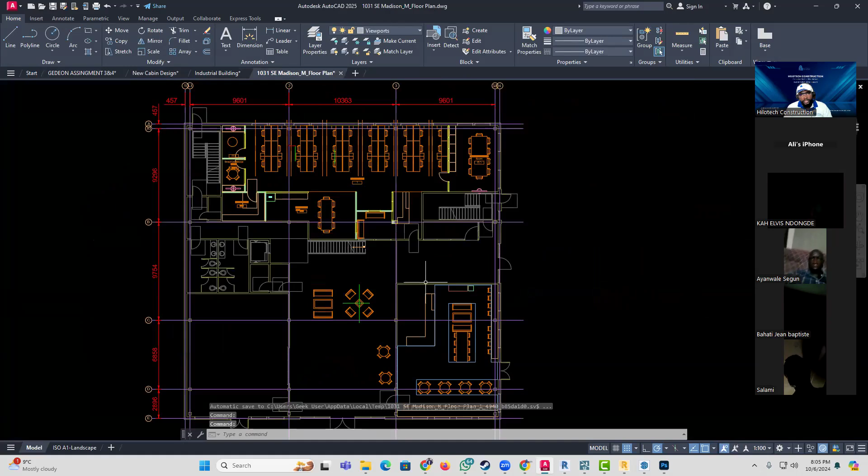And of course we can use AutoCAD to bring out architectural drawings like plans, blueprints, like the one we're seeing in front of us here. We can also bring out 3D, so we can bring out plans in two types: 2 dimensions and 3 dimensions. What is 2 dimension?

2 dimension means you can draw your plan in the X and Y axis. That's why when looking at this plan, you see it this way or this way — this is the Y axis, this is the X axis. That's what a 2 dimension plan means. Now a 3 dimension plan is one you can see in both X, Y, and Z. I'm not diving deep into that, just trying to make you easily understand.

So we were using CAD on AutoCAD and everything was moving smoothly, but there's a little problem. A lot of people just come into AutoCAD and start drawing, maybe because they don't have very good training in it, and they just dive in without any sense of direction. This is something that even professionals really struggle with.

When you come into AutoCAD, instead of using the software the right way to bring out designs, what kind of designs are we bringing out? We're bringing out drawings used for a project, what we call construction drawings. So what we are going over in this training is showing you how to use AutoCAD to really bring out construction drawings, not just normal drawings that anybody opens AutoCAD and dives into, drawing without any sense of direction. No, bringing out construction drawings. What does that mean?

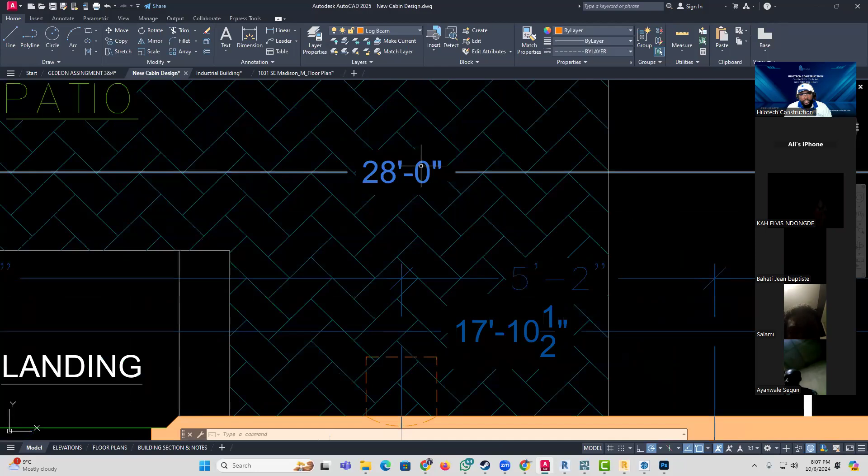Don't worry, the dimensions here are in imperial units, but we are going to be working with metric units. When I say imperial units, that means feet and inches, which you can see here. This is in imperial units, but we'll be working with metric units.

So when you look at this plan, what do you see? You can easily tell that this plan has a living room, a dining room, from the labeling and all that. What else can you see? You can see dimensions, but what else? If you look closely again, what else do you see on this plan?

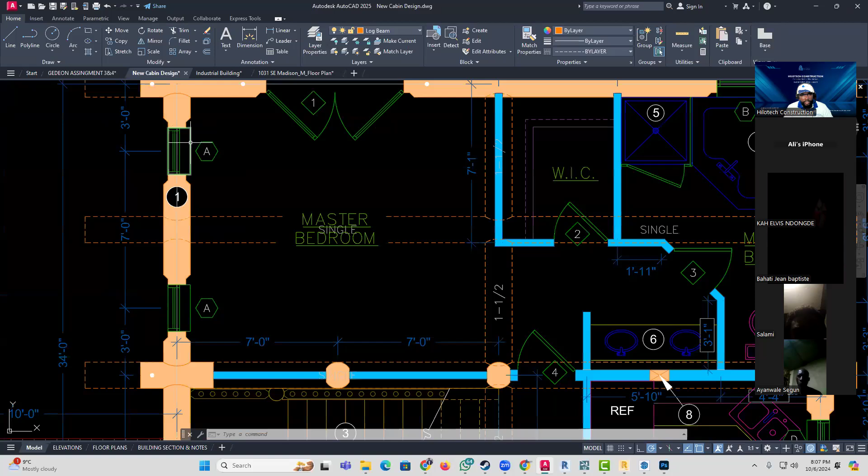You see there are certain points which have some stuff attached to them. Like here, it has a letter. There's another letter here, which is the same as this one. But coming here, we have this number. Do we have that same number again? No, we don't. So these are called tags.

Now what are tags? Tags are on plans to give you more in-depth detail of what this component is. First, looking at this plan, what is this? This here is the deck, or what they call the veranda or the porch, however you call it in your country or in your own building design code.

So this is the deck. Now from the deck you leave and come into the living room, and from the living room you can come to the dining. Now we have two components here. We have this one, it has 'H' attached to it. So this is the tag, which is what? H. So now, why do we have these tags on the plan?

The reason is because this architect is trying to bring out a construction drawing. He knows that the construction drawing does not just end with you bringing out a drawing that has dimensions and all. No, it has to be in such a way that even the manufacturer of all these openings understands it, because what we see here are openings.

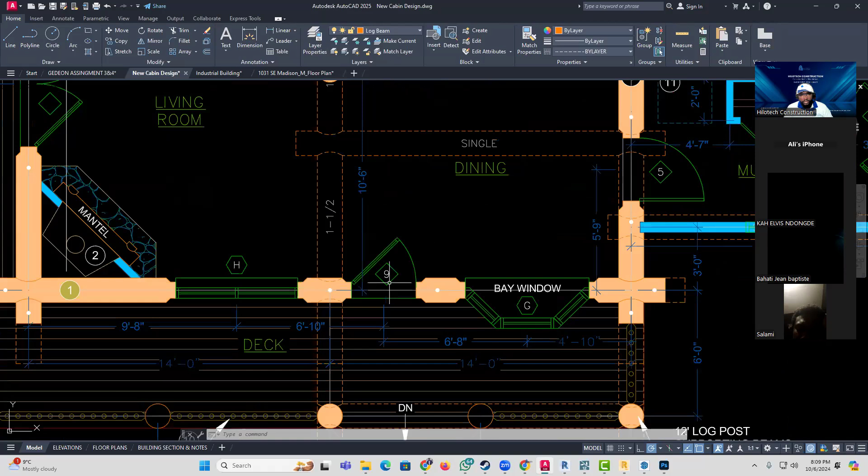This is a window, this is a door, this is another kind of window with a different design. This is another door, which is a single shutter. This one is double, another double one down here. You've got all the windows, but these windows and all these openings are made of different materials. They have different sizes, different heights.

They have all that. Now, for those of you who are really in the field, you'll all agree with me that there are a lot of projects that start, and it's at the level where they've brought up the skeletal work that you now start seeing them saying, 'Oh, okay, so what kind of window are we putting here now?' You now start taking measurements and go on from before. No, it is not supposed to be like that.

Bringing out a construction drawing means you're bringing out the plan as if you are building the structure in the plan. So by the time you are done with your plan, it has all the details that anybody who picks up that plan, whether it is the architect, the engineer on site, or the client, is able to understand it. Even the people that are going to be doing what?

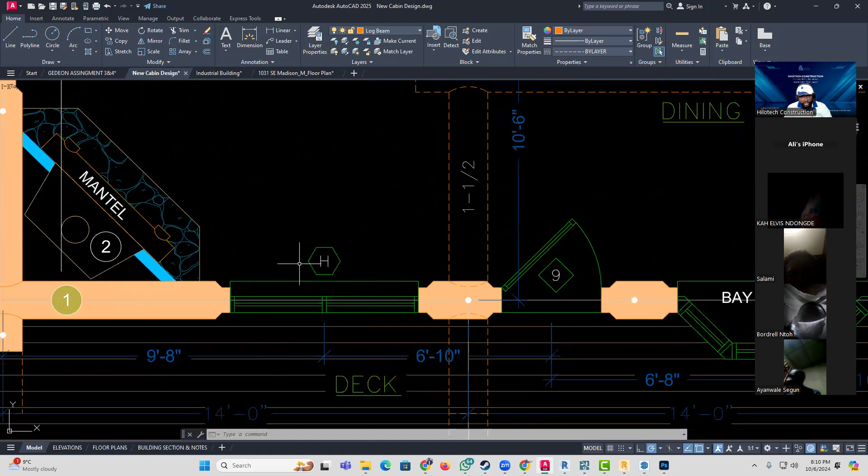Let me take this plan again, for instance. Imagine that this plan has been done like this. We have this tag here, H. Now, if we look around this plan, we don't see anything. We are like, oh, so what does this H really mean? What is this H talking about?

But if we come under the floor plans here, you are going to see this is that same floor plan that we're looking at there. If we look below, what do you see? We have a window schedule. So this window schedule has a series of symbols.

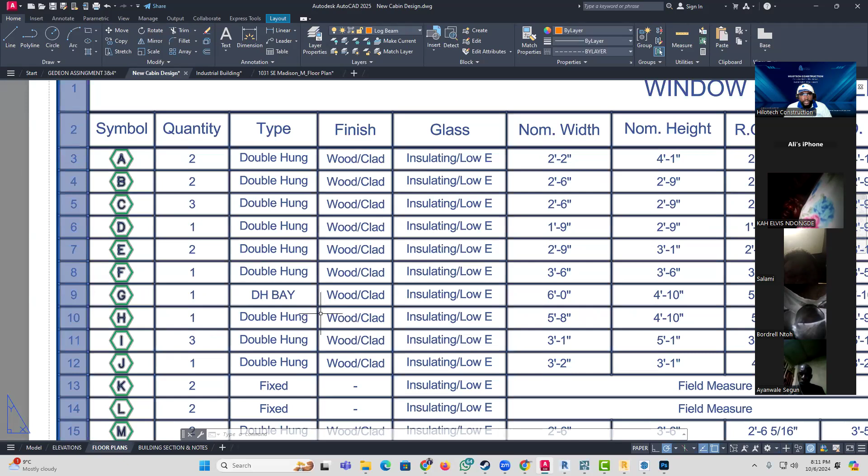Now, all these symbols here, these are those tags. And if we were to scroll and go to where we have H, we are going to see all the details of that component. We will see the quantity, we will see the type, we'll see the kind of finish that is going to be done there, and all that. We'll see the height, we'll see the width.

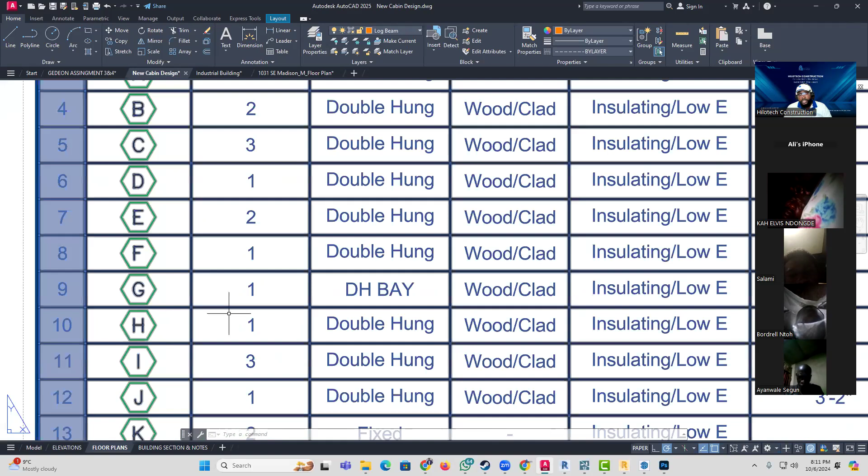Now, if the manufacturer of this window picks up this, he can just take this and go straight, and he doesn't even have to necessarily come to the site to verify this, even though it is very important to still come and verify, but you get the point. So anybody doing this is able to understand.

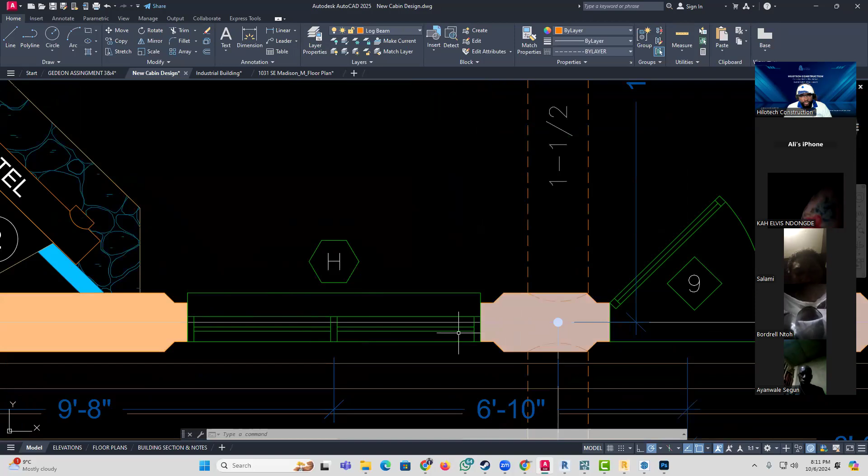So why is this important? This is important because if you have all these details, even the builder that is putting up this structure is going to understand that, okay, when I come to this wall, I have to allow a window of this set distance. You have to look at this window very well. You see that everything from the frames to the finish and everything is there.

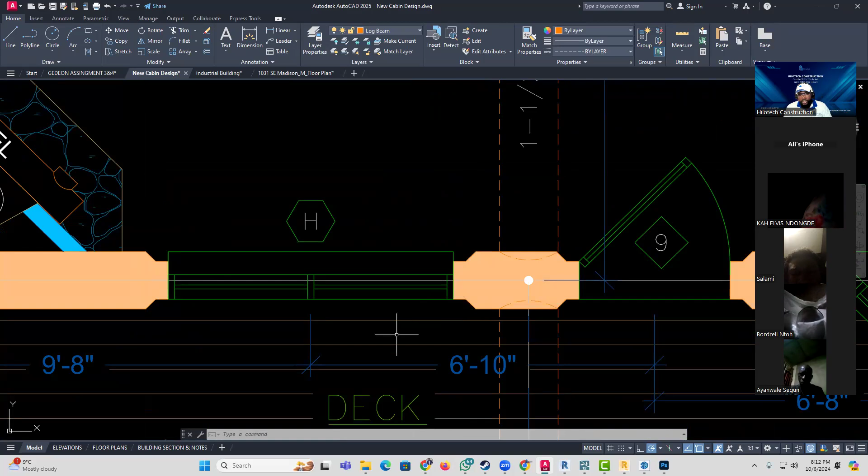A lot of people just come and they give the allowance, but you discover that maybe they just gave the width of the window. They didn't take into consideration little details like maybe the frame that is around the window, and that is more space. So what do you end up doing? Maybe you end up providing a smaller opening for a window that is not going to be able to give the accurate or appropriate ventilation that this building actually needed, and stuff like that.

So, what are construction drawings? Construction drawing simply means you are building the project on the plan, and it takes very good site and field experience. So, if you are in here and you think that being an architect or being a designer means you are only sitting on the computer, no.

A BIM expert is somebody who has a lot of site experience. It means if you have not been going to the site, you have to start going to the site, like a lot, okay? Because you are not a robot. You are not a robot. You are supposed to understand exactly what you are doing.

You are not supposed to just be doing things because, okay, you come and you will be like, all right, the bedroom, what is the normal size of a bedroom window? Okay, I'll be speaking in centimeters, please. So maybe 150 centimeters, that's 1.5 meters by maybe 1 meter. No, you are not supposed to be thinking like that. Okay? You're not supposed to be thinking like that.

You're supposed to know. And you have to know that with respect to whatever component you are dealing with, like the living room, nobody has to tell you that the size of the window you put in the living room is not the same size as the window you put in the bedroom. Why? Because the living room is going to normally need more ventilation because it has more space. Same with the dining, the kitchen too. You got the bedrooms now, and all that.

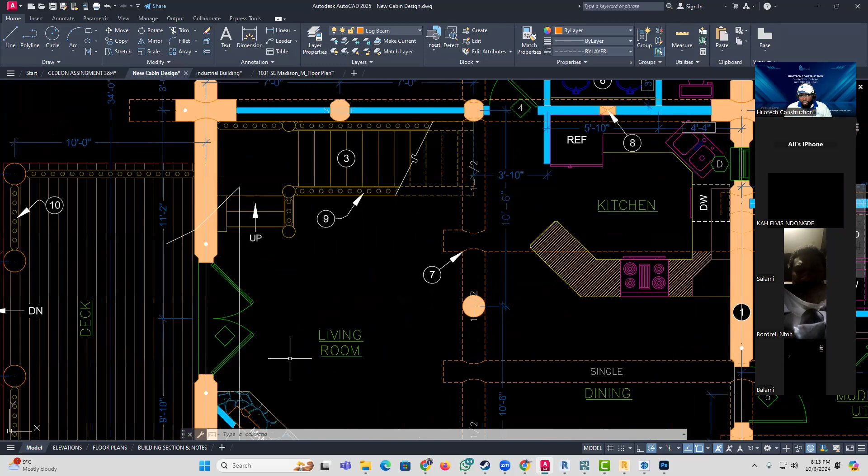Now, I'm just trying to limit this. The same thing goes with the doors. The same thing goes with the walls. The same thing goes with the columns. The same thing goes with all the different components that are actually making up the structure. Make sure that you put in all those key details.

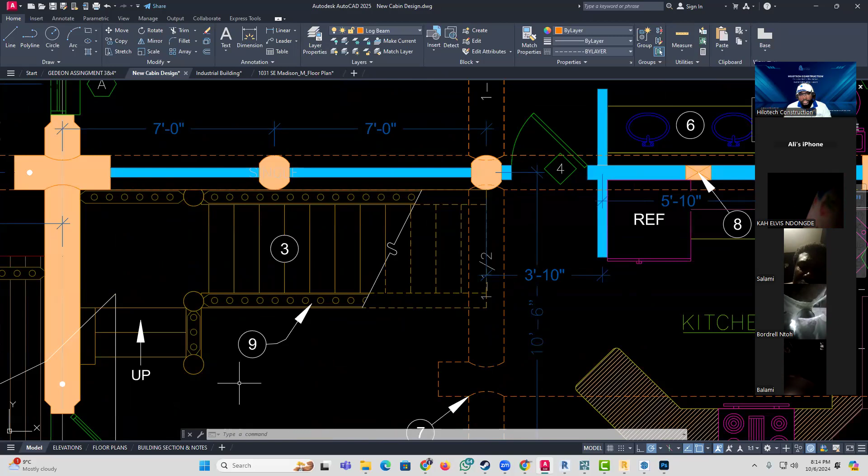Look at the staircase in this building. What do you notice here? Now, some architects will decide to put the height of the riser and the going on the staircase. But this architect has decided to put a tag. Why? He decided to put a tag, and there's another tag here which describes the railings that are going around the staircase. This architect is putting a tag here because he knows there is more information that he wants to put as far as this stair is concerned.

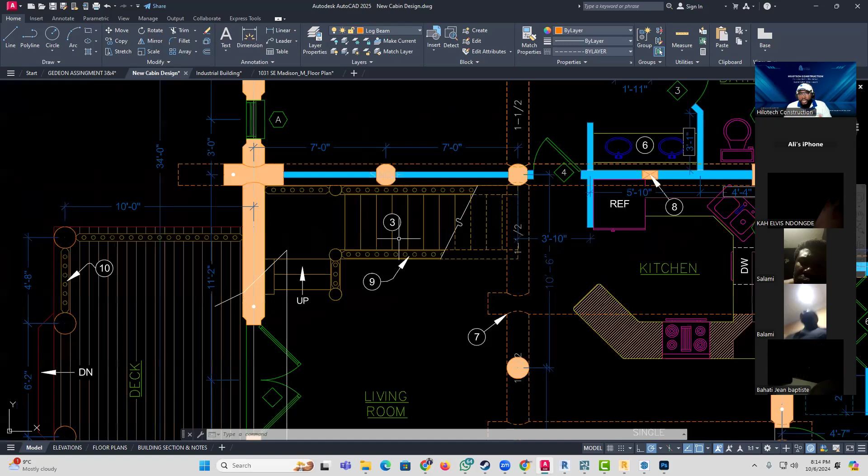Maybe the kind of finish - you can look at this staircase from the plan and go do a concrete stair, when the architect or designer actually wanted something more stylish, like maybe out of glass or wood. But you go and cast it out of reinforced concrete, which is not what is needed there.

But if you are intelligent enough, you are actually going to...

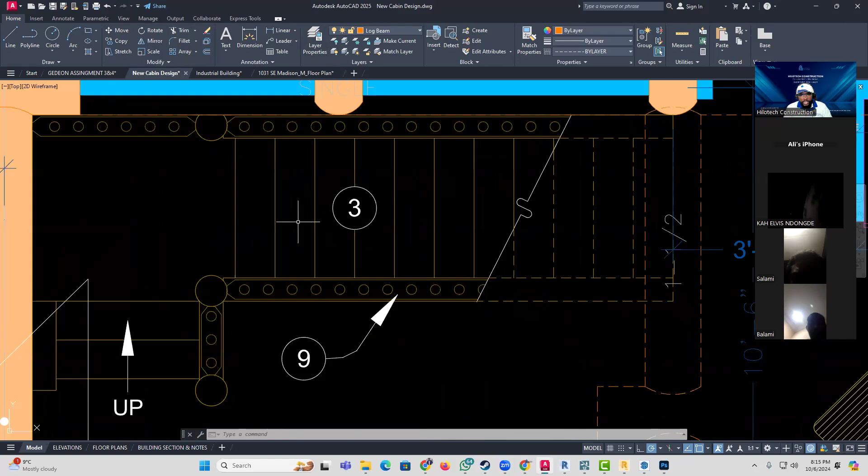Okay, so like I was saying, this designer has decided to put a tag here instead. Why is this important? This designer wants to take his time and describe exactly how this staircase is.

If we go to this tag, you'll see it contains all the information this stair has, from the risers - the step you take when raising your leg going up a stair, that is called a riser - to the going, which is the part you actually put your leg on. The going has to be of appropriate size, not too small or too big, you know that.

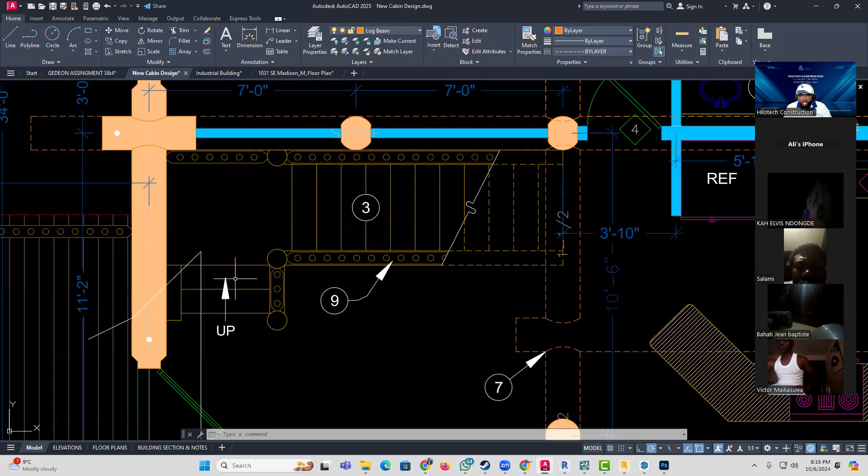So he takes his time and describes that, and in addition tells you the kind of material that has to be put here. Even on the railings, he tells you the kind of material on a separate tag, you see this? Now someone who knows how to interpret the plan well picks this up, understands this information, and goes straight to those tags.

Now coming to, let's say, the kitchen. This is the kitchen setup. By the way, it is the open kitchen, the American standard kind of kitchen. You can see there is no wall separating the kitchen from the living room or dining - it's just open. These designs are always done like this.

So you have a whole living setup, it doesn't mean anybody in the kitchen is cut off from the family. If you're in the kitchen cooking, you can still be discussing with whoever is here. So it's kind of a modern design.

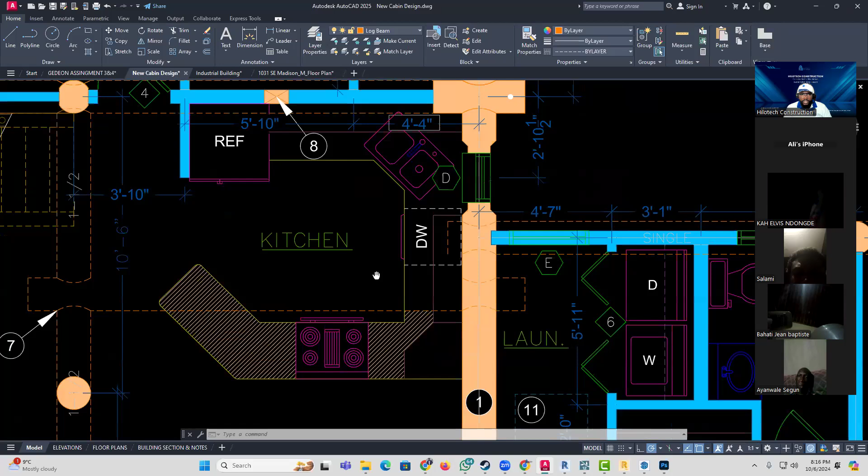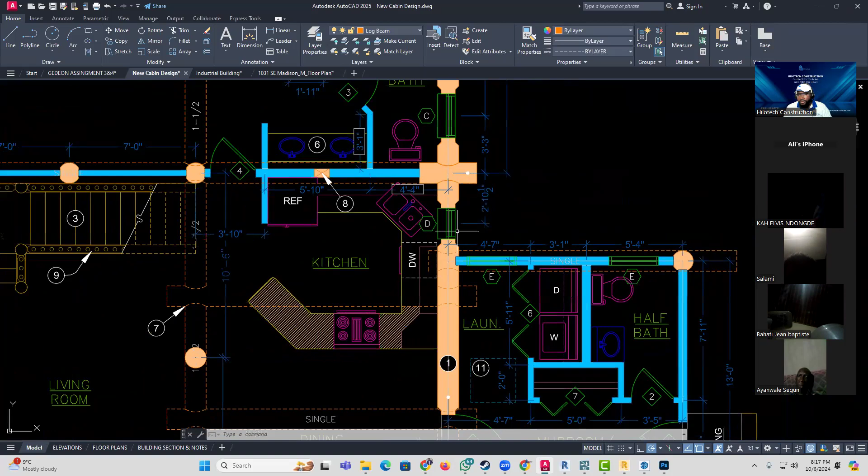And because this is a modern design, such designs always have stuff that takes out the smoke when you're cooking, and the scents that come out. That's why you see this window here is small, because really there's no need for a very big window here, since that compartment ventilates the kitchen. But you are supposed to make that known, because somebody picking up this plan to execute might not know that, and they put this window here without making provision for that, and it becomes a problem for ventilation.

You get the point. Now you see there is another tag there, another tag here on this column close to the kitchen. So the point I want you to note is a construction drawing is not something that is specific - it depends on you, but you have to know what you are doing.

And what we are going to be going over, as far as the whole program of the construction drawing, we're going to show you how we take you from scratch to a professional, and you are going to be able to design your own drawings using your own system.

What do I mean by your own system? I'm not supposed to do a plan, or Hilotech Construction is not supposed to do a plan, and you or another company, if you're the owner of a company or an architect, do a plan and we look at it and it's the same. No, you have to have your own system of design. It can be that your units are different, it can be that your layers are different - of course the layers must always be different. What do I mean by layers?

If you look at this plan very well, you are going to see that the windows have a different color from maybe the deck, from the walls and all that. You see all the furniture in the kitchen here, they have different colors. It's not just there for decoration. These are all different layers.

Why is this important? This is important because if I want to do something on this plan, I can easily hide all these other components. I create a copy of this and unhide them back, and they're going to remain only on the parent copy. We're going to be seeing all that. We're also going to be seeing how you can create title blocks for yourself.

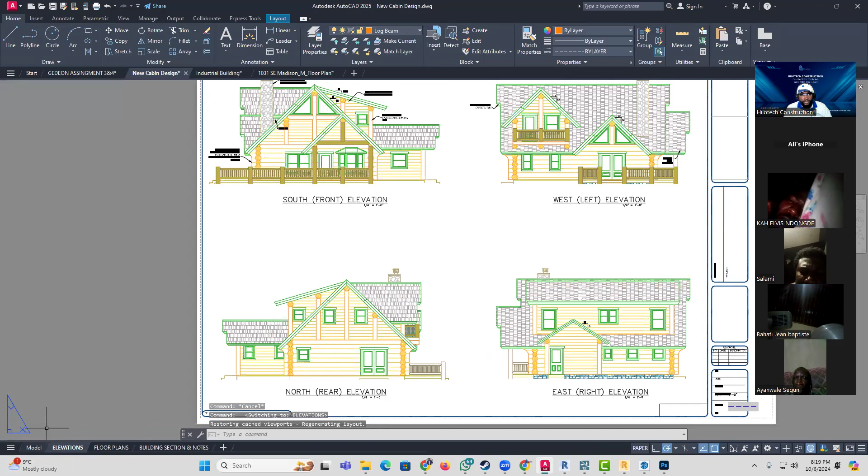Now, if you look at this, this is what we call a title block. A lot of architects and professionals don't even work with a title block. They think that working in AutoCAD is just for you to come in here, draw your plan in your model tab, because what we are currently in is the model tab. You bring out your plan here in the model tab, and that is it. Now, when you want to plot out your plan, what do you do? You come up here to plot, or you just press Control P and start plotting independently, one after the other.

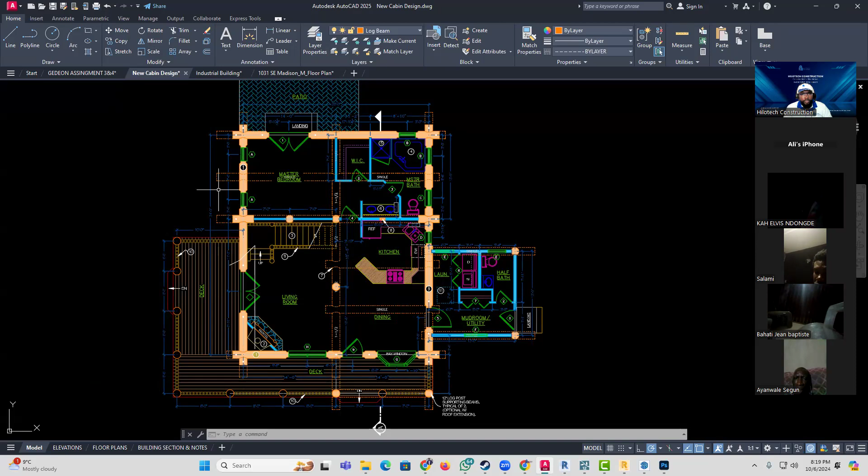No, it's not supposed to be like that. We'll show you how you can bring out an appropriate title block for yourself. I'm going to share a sample assignment here from a past student.

This is a past student, Gedeon, and he's still a current student actually. He's done with AutoCAD, and he's now in Revit, I think. So you see what he did. Now this is his title block. This is what is called a title block.

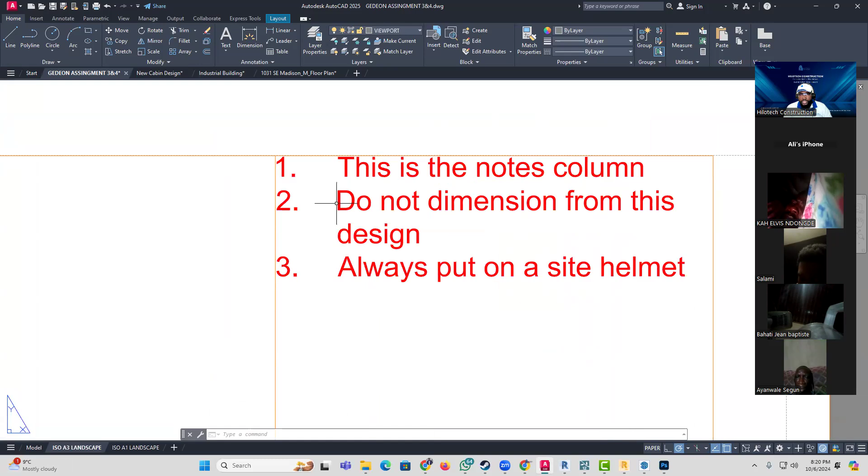Now, a title block has to be independent to each other. He designed this title block for A3. So this is what he brings in all his plans on. What do you notice on this title block? It has the name of the plan, it has his Gmail, it has other construction details, which can be like notes that you put for security on the site.

Then, of course, it also has his details here. It has been drawn by Gedeon, it has been checked by Hilotech, and approved by whatever regulatory body that you have in your council, in your country. Now, in here, this is where you bring in the plans. Like, for instance, you see on the next page, now you see he starts bringing in his plans here.

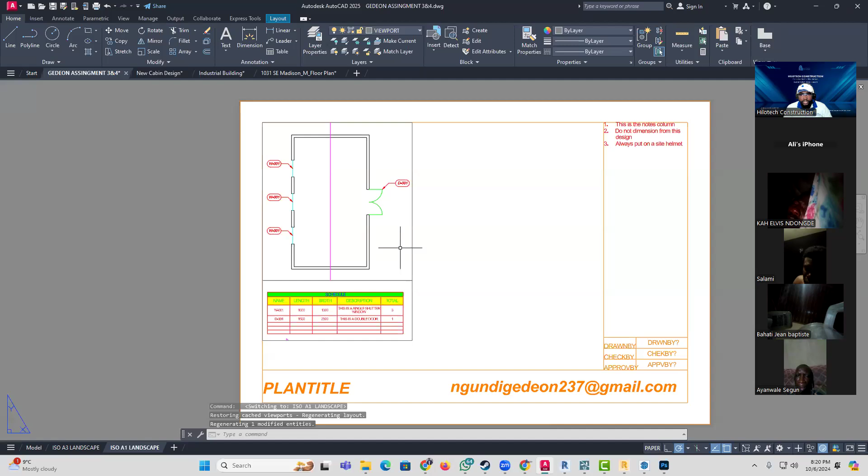So by the time he prints out this plan, and it is very easy for you to print using the title block, it's going to come out with all these little bits of information. Do you see what he is doing here? I want you to take note of what he's doing here. This is just a simple, very simple, open room kind of plan. But pay close attention to what he does.

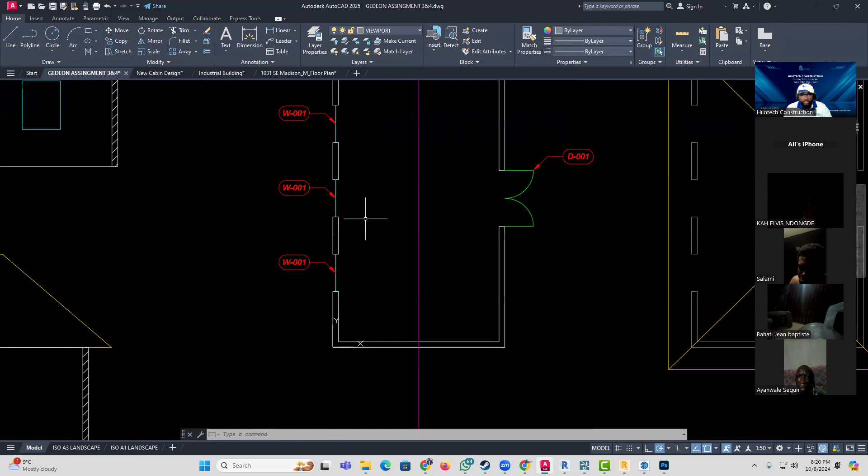Now, you see this? He's putting some numbers here on the windows. The door has a kind of number too. You don't really know what this means, but going up here, he creates a table and calls this schedule. Now you see name, length, width, description, and total.

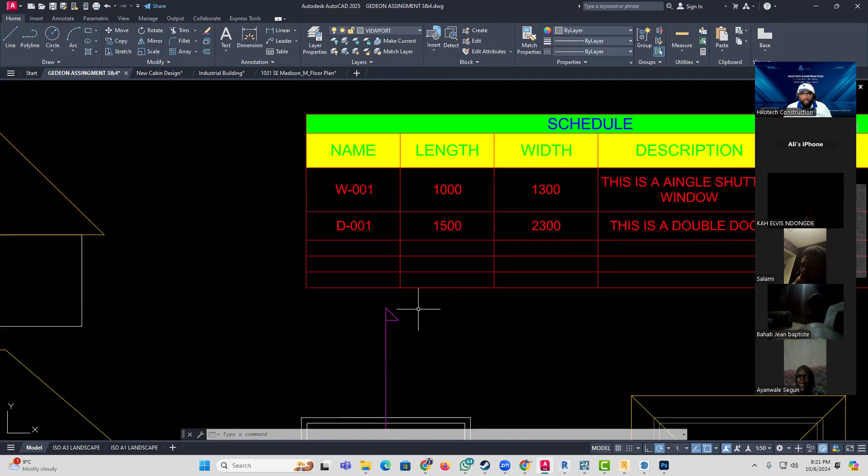Now, look at this. He comes here, he says W001. If you go on his schedule, you are going to see that W001 is, under the description, he says this is a single shutter window, and there are three of them. So if a manufacturer was to pick this up, the manufacturer of these windows, he's just going to know exactly that the length has to be 1000 millimeters. He's designing in millimeters, by 1300 millimeters, or 1 meter by 1.3 meters, or 100 centimeters by 130 centimeters. I'm just trying to cover all this so you understand that.

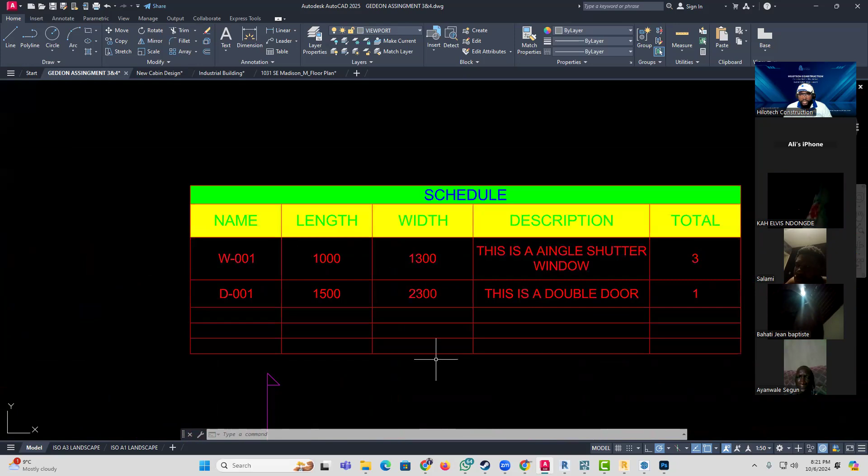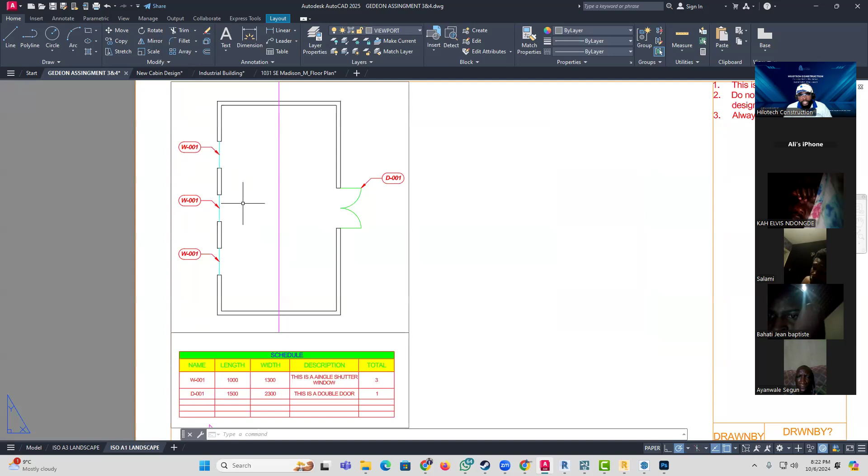So he just takes this directly and goes straight to manufacturing. And of course, the builder or whoever is actually putting this up should make sure that they respect this dimension so that when these shutters are done and they come in, they can easily fit in here, as you can see. He does the same for the door. So if you look at his plan here, he is not only printing out the floor plans, which is what a lot of people always do. He is printing out his floor plans, and in addition, he has a schedule attached below.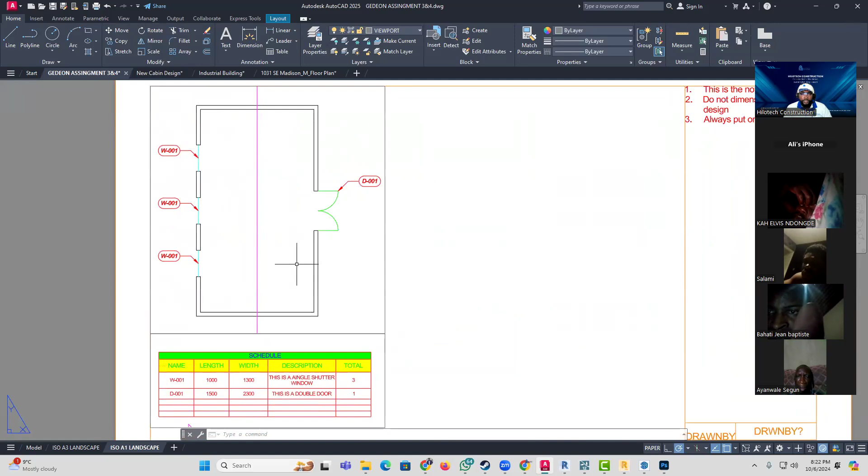Now, on that schedule, he has all these little bits of description that are describing what is actually on the plan. You can easily see it on the schedule. This is an example of a simple construction drawing, but of course, it's going to differ with respect to whatever project you are working on. And this really brings out your professionalism. It shows that you really know what you are doing. Anybody looking at this plan can easily understand it. And actually, this is the right way of bringing out plans as far as construction drawings are concerned.

Okay, so that is just a little example. What we're going to be trained on is actually way more advanced than this, but this just gives you a little bit of an example of what a construction drawing is all about. It is just a drawing that really shows the exact details of what your plan is talking about. A drawing that communicates your design intent. It really puts out what you're trying to communicate or sell out there as far as the plan is concerned.

So anybody can understand. You are not designing the plan for yourself. You are designing that plan to be built. And in the building team, you have to do the plan in such a way that everybody involved in the building team, from the client to the architect, which is you, to the engineer, to even the suppliers that are going to be supplying the materials, everybody should be able to understand that plan. That is what it means to actually bring out a real construction plan, not just an architectural plan.

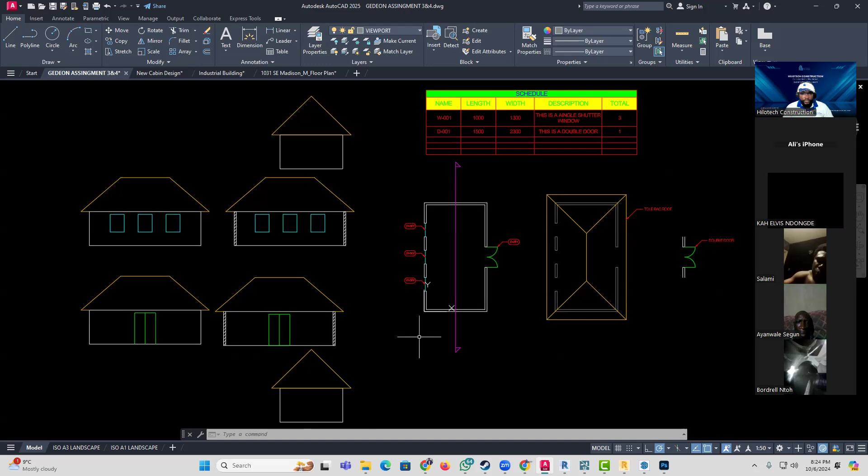Okay, so that is what we're going to be looking at as far as AutoCAD is concerned. And from there, we are now going to be moving into Revit. Now, Revit is the software that we are actually using to really bring out BIM, Building Information Modeling.

Building Information Modeling is not a software, please. It is a procedure to achieve perfection. It is a procedure to make sure that by the time you are done with your design, it is 100% perfect. So that you are not bringing out designs that at the end of the day are not executable.

Or even if it is executable, maybe you did not accurately communicate the details of that design to the client, in terms of cost or time and stuff like that. The clients do not really understand that, and they run short of money. The project is abandoned. No, the BIM system takes all that into consideration, and you make sure that by the time you are bringing out your plan, it is 100% perfect.

Okay, now we'll leave it here at AutoCAD. Let us move to Revit. And this is Revit right here. So Revit is the software that we are actually going to use to try to bring out BIM or to achieve BIM. Now, they are both Autodesk software.

What do I mean by both Autodesk software? This is AutoCAD. AutoCAD was designed by Autodesk. You can see Autodesk AutoCAD. Revit is a software that was designed by Autodesk too. Of course, you can see Autodesk Revit.

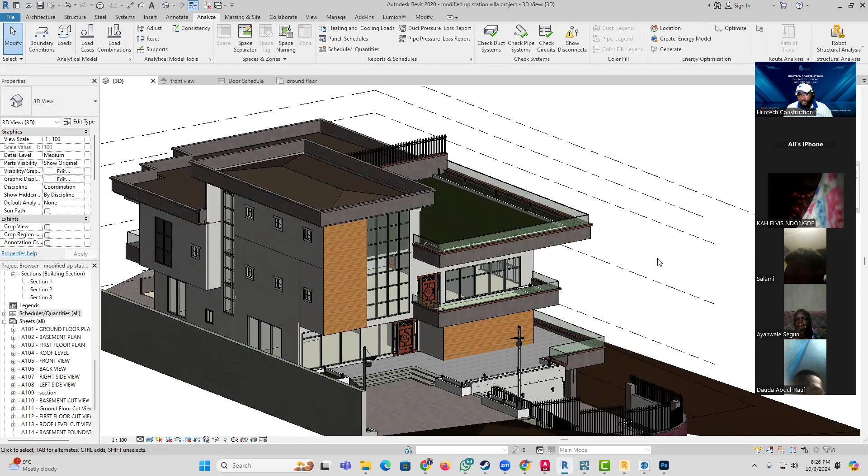So the question now is, but why is it that Autodesk will do this software, Revit? It is because they have understood that there's a lot of problems in the field that really need to be addressed. And that is why they brought out this software. So this software is here to solve those problems. And believe me, it is a software that if you master very well, you are going to bring out a plan that is 100% perfect.

And I will try to explain that by using this plan as an example. This is a current project that we're executing here in Cameroon. For those of you who are in Cameroon, this is actually going to be around Up Station, just going up after the judiciary police and stuff like that. So this is a plan of a modern villa, which has a basement.

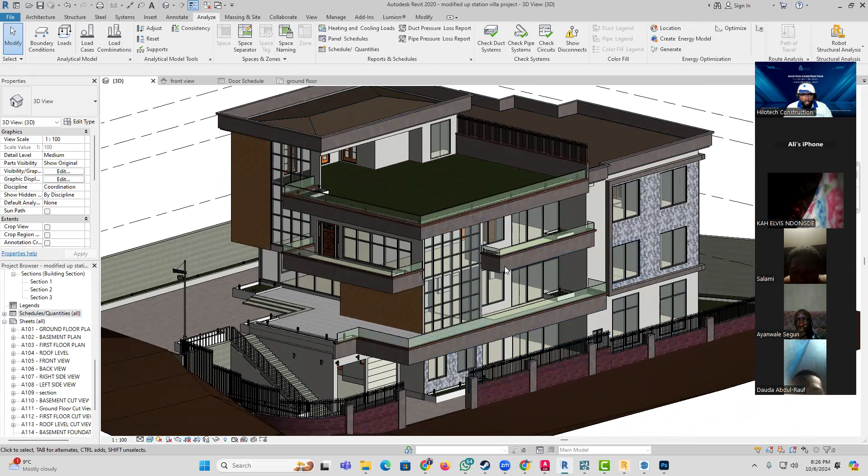This is Revit. Now, I want to show you something. Now, AutoCAD, with all what I've explained here, you can see that it sounds very juicy, right? But there is still a problem as far as AutoCAD is concerned. Don't misunderstand me or misquote me or something. AutoCAD is still a computer-aided design software, which means that everything that we are doing here is specific.

What do I mean? If I want to draw my plan like this, I have to draw this plan. From this plan, I bring out these elevations. From these elevations, I have to take all the details, the sections, and all that before I start working on my estimate.

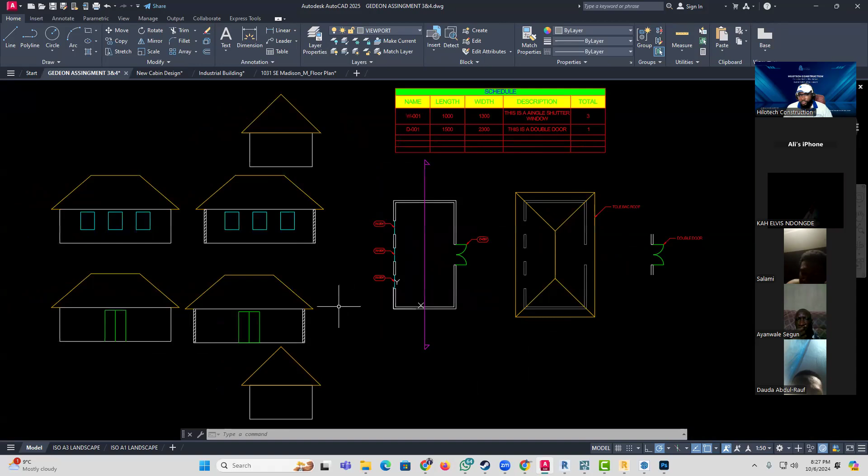Now, just imagine you were working on a 5 or 10-story building, and the client comes and says, 'Oh no, I don't really like this window. I want you to change it.'

If you're already done with the plan, you have to start changing that from the plan. You go to your floor plan, you change it there. You look at your elevations. Okay, this window was here, you delete it, you draw it back. You do all those changes before you go to your sections, before your estimates and stuff.

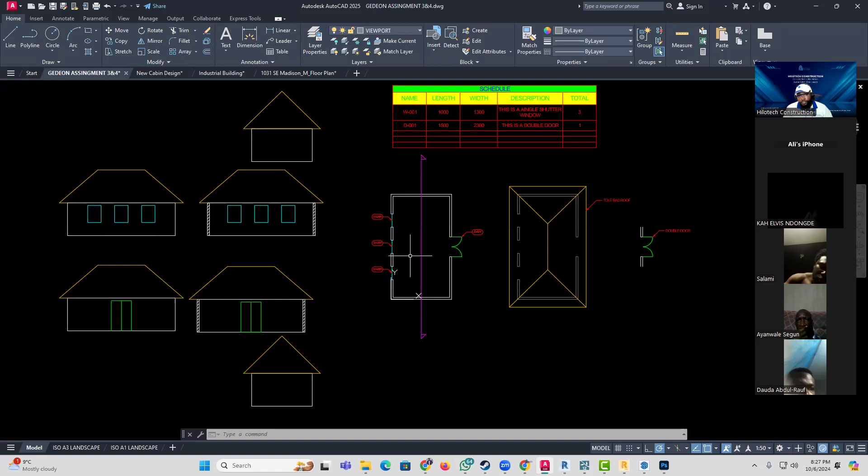It's just a lot of work. And there is room for error, serious room for error. So that is why we have Revit.

Now, what is happening with Revit? Revit being a BIM software, the best BIM software by the way. There are other BIM softwares out there, but Revit seriously is the best. Revit being a BIM software is there to solve all those problems.

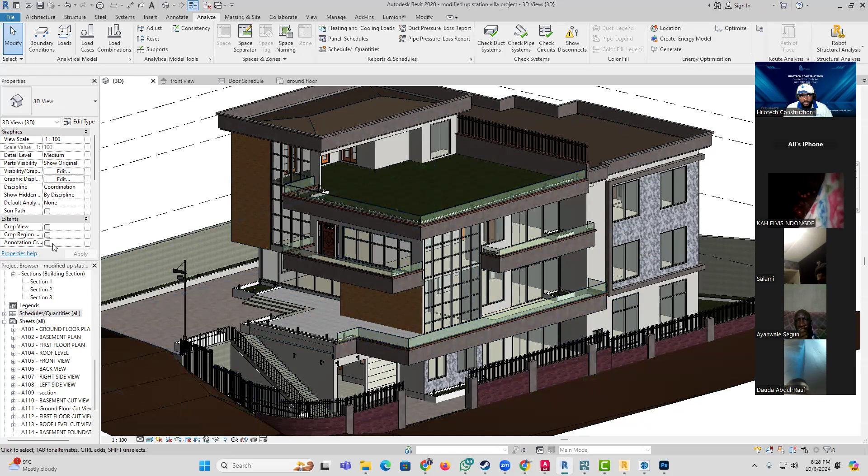Now, what we are seeing here is the 3D or three-dimension plan. If I was to open up the ground floor plan, this is it that we have here. This is the ground floor. Now, by the time I started drawing this ground floor plan...

Every other thing is coming out from my elevations, to my sections, to my roof, to my three-dimension, and most importantly, to my quantities and estimate. Imagine how many things you're solving just by drawing this plan. And it is bringing all that with 100% accuracy, which means there is no room for error.

Because what do you always do when you finish drawing your floor plan in order to bring out your estimates? You take the floor plan and start counting, okay, how many doors are on this plan? If you did not even bring out a plan in the construction drawings way that I'm explaining here, it's even more tedious because you have to start counting.

Okay, how many doors are here? 1, 2, 3, 4, 5, 6, 7, 8, 9. You can miss one, okay? How many windows? You start counting.

Worst of all, surface areas. What is the surface area of this room? You come, you start measuring. There is really room for error. The perimeter of the walls, you have to start measuring them. You measure this, you measure this, you measure, you measure, you measure.

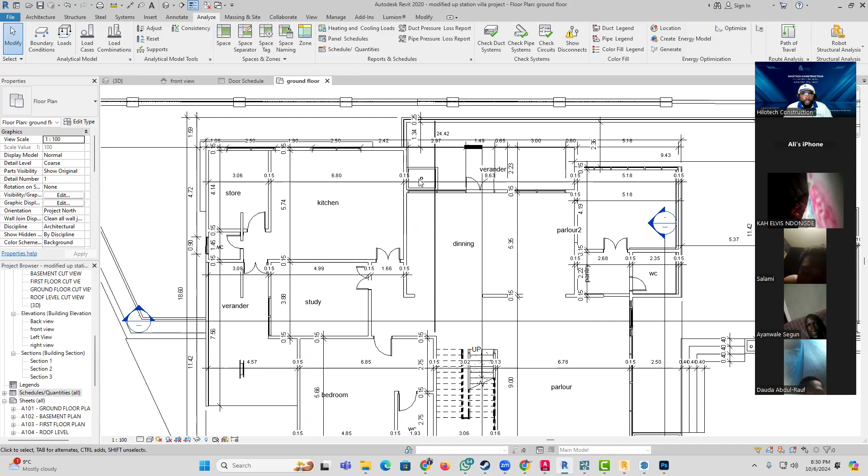So look at this, let me just tile this here. Okay, now you see I've tiled this, I just opened different windows. This is my floor plan here, which is the floor plan we were just looking at. This is the front view, this is the floor plan, and this is the 3-dimension view. You can see that very clearly. And this is my door schedule that I have here.

Okay, watch what is going to happen. Now, in the course of working...

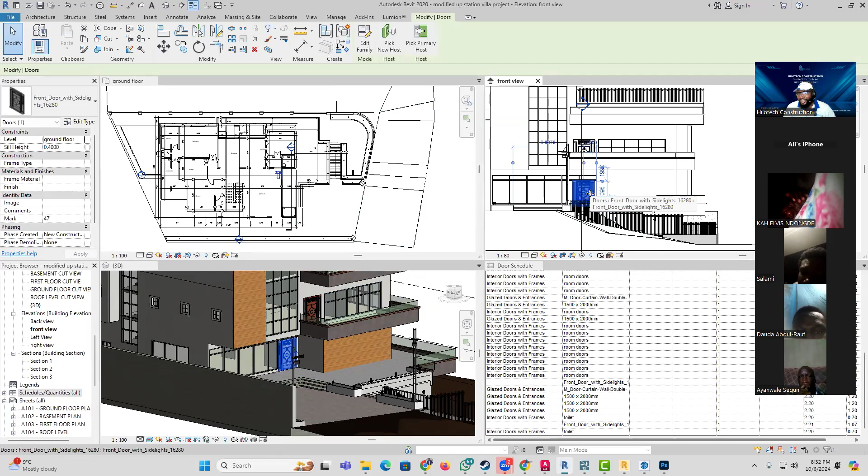So I've selected this door in the elevation, but look at what is happening. It selects the same door in 3D. It selects the same door on the floor plan. Look at this. And you want to know the best part? It selects that same door on the estimate.

So whether I'm changing this door on the estimate or I'm changing it here or here, it changes in the whole plan, and it adjusts everything. It adjusts even the cost and everything automatically. Did you imagine how much time you're saving just by doing this? And there is no room for error, really.

It's very smart. Even if I was to change this wall, or just the size of this wall, or even the type or anything, it changes all through the plan. Look at this, you see, I selected a wall. It is selecting here, it is selecting even on the floor plan. Everything is just linked up or connected together.

So now that is just to give a tip of an iceberg of what BIM is. And you see, doing things like this now, it makes work not only easy, but it also makes work perfect. That is why you see with BIM, if you follow the procedure very well, there is no room for error. You are designing or bringing out a project with 100% accuracy. There's no room for error, and that is actually how it is supposed to be.

There's actually supposed to be no room for error as far as designing and everything is concerned, because by the time you are done with the design and it is going to the field or the site to be executed, you don't have to go. I always say this, if you have any wall or any change to do on the plan or anything, change it on the plan. Don't go and start doing changes on the site.

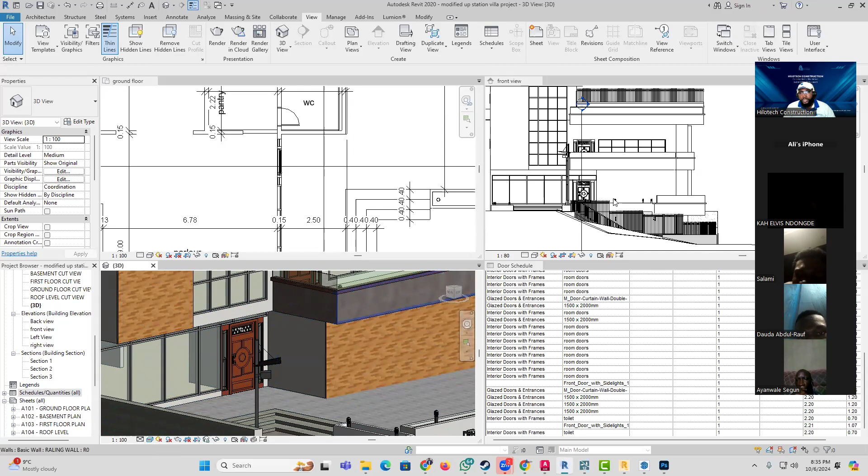But it is your place as a professional to actually really explain to your client exactly what is needed, okay, or what is right as far as that is concerned. But you are able to actually bring the client and every other person that is also involved in the whole construction process to understand exactly what is going on. Now, that is just the tip of an iceberg of what BIM is all about.

And then taking it a little further, which we are going to be coming back to as far as the advanced courses are concerned. Everything I'm saying here still has to do just with the BIM course, okay? Now, like I've mentioned before, it's a software that you can use not only for architecture, but for structural, mechanical design, plumbing design, steel design, heating, ventilation, and air conditioning, and all that. Why is that important? Of course, it's very important. Why? Now, you all know the problems that we always have on site.

When an architect draws a plan as beautiful as this, the engineer is going to come and say, after going through that plan, I'm seeing that we have to put 3 or 4 columns or pillars in the living room. If not, the building is not going to be structurally stable.

Now the architect from his own side is going to say, no, that's going to destroy the aesthetics of the structure. There's always that back and forth argument, which leads to disagreements, loss of time, loss of money, and all that.

And maybe at the end of the day, they don't even agree, and there are serious problems. As a BIM expert, you're supposed to know all that. Now, this same structure that you're seeing here, after bringing out the architectural plan, we do the structural plan following this same structure, and we are able to carry out our analysis and everything, and we are sure that this plan is 100% okay as far as the structural analysis is concerned.

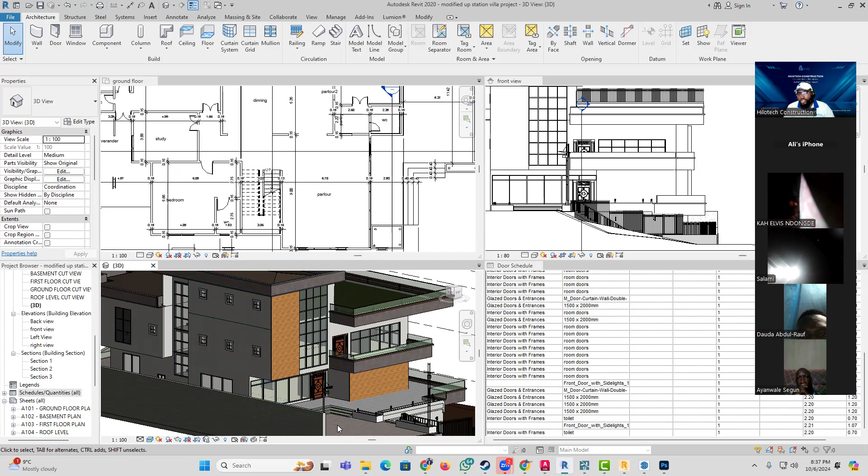So, as a BIM expert, don't think your job only ends for the architectural part. No, you're not only drawing a building that looks beautiful, but you have to actually bring out a structure that is executable, that is strong as far as the strength is concerned. It is better for you to do changes in the plan that obstruct the aesthetics a bit, but it is structurally good, than to do something that looks good but is not structurally okay. We can all agree on that.

But then there's another problem too, again as far as the architectural part is concerned. Imagine that you finish doing this plan, yes, it's looking very beautiful. But then at the end, the interior designer comes in and says, okay, this building is done, now I want to do a setup in the kitchen here. By the way, this is a very big kitchen, but not all kitchens are like this. Not all clients will give you the luxury of actually designing the structure to be this massive.

But there are clients like this which don't have a problem with that. Now the interior designer is going to say, okay, what kind of components do you guys want to put in the kitchen? He might propose things that you did not even envisage on the plan. He might say, maybe in the kitchen I need more sophisticated things, like I want a washing machine to be in the kitchen, I need a dishwasher, I need things like microwaves. Or maybe you just need space for your refrigerator, which is just a small one, but they want a bigger one. All those kinds of things.

It brings problems, it brings serious problems. Even in the bathroom, for instance, just imagine getting into the bathroom, you design a little bathroom for the client or for the masters. The master comes and says, no, I want to have a separate wet area from the dry area, and of course I want to have something like a bathtub, all those kinds of things. These are the jobs on the interior.

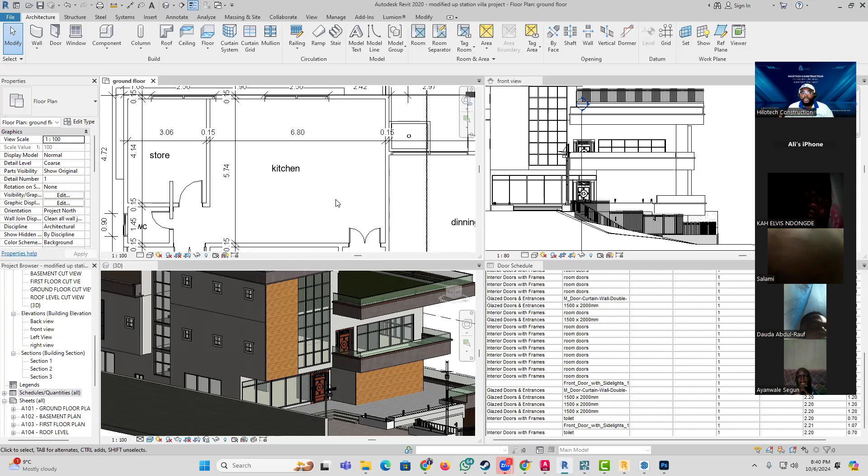No, it is your job. By the time that project does not go through well, you are going to be held responsible, or the blame is going to come for you. And in this field, what actually sells is recommendations. By the time you take your time and you do one project well, that is how you sell. That is what makes you have recommendations, or one client can recommend you to another person because they're going to be like, no, go meet this person. This person is really professional and he's going to solve your problem. You understand what I'm saying?

So even at the level of interior design, you still have a problem. Coming to electrical design, there's still another problem. Why is there a problem? Because now you can still finish doing this. Architects always like bringing out electrical plans and stuff like that, but they're not always accurate, because now the client can be like, he wants some kind of sophisticated appliances in the structure, which you might not have really included in your initial design, and that will still cause problems, leading to breakages and stuff like that. So take time and ask the client, what kind of structures, what kind of components am I talking about here?

Maybe even the interior designer coming here in the kitchen, he's like, okay, we want to make this really look beautiful, we'll add some LED light, we'll add some ceiling, all those kinds of stuff to really make it look beautiful. But you, on your initial electrical plan that you produced, you did not make provision for those sockets. Maybe even going into the kitchen, if they add things like dishwashers, washing machines, stuff like that, you did not make provisions for those connections. What do? It's a problem.

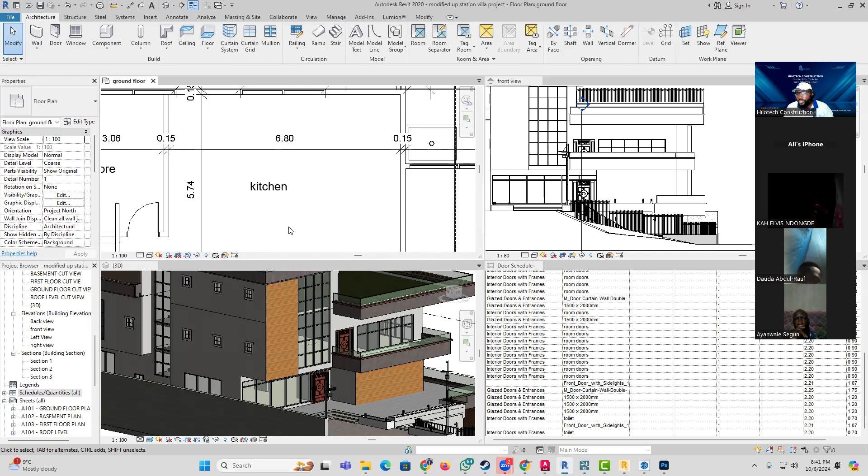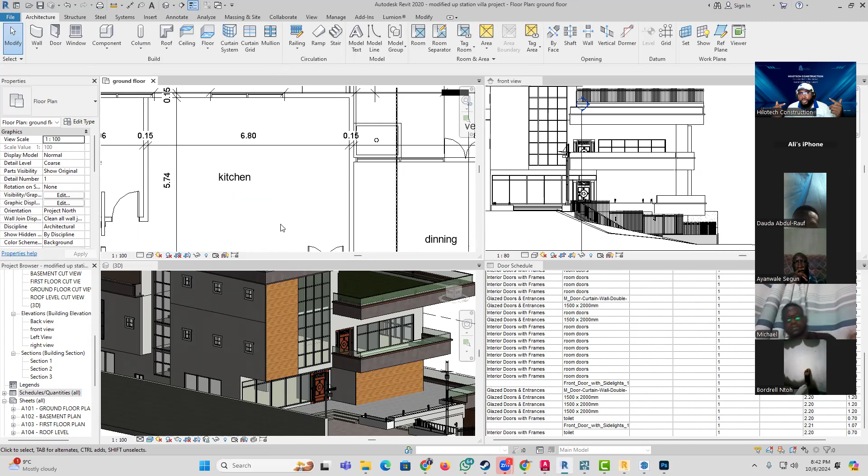You understand? So even on the side of plumbing design, there's still another issue there. Why? Because now, let me just remain here in the kitchen. Many plumbers just do their plumbing, normal, local, cheap kind of plumbing that is very local, normal. But the client looking at that will not understand. In his mind, he might have certain components or certain things that he's aspiring to actually have at the end as far as the plumbing design is concerned. But you did not put that. And at the end, he's gonna be like, okay, no, I need this component, I want this component. First, you did not provide a space for that. Secondly, you did not even provide the necessary connections. What do? You start breaking.

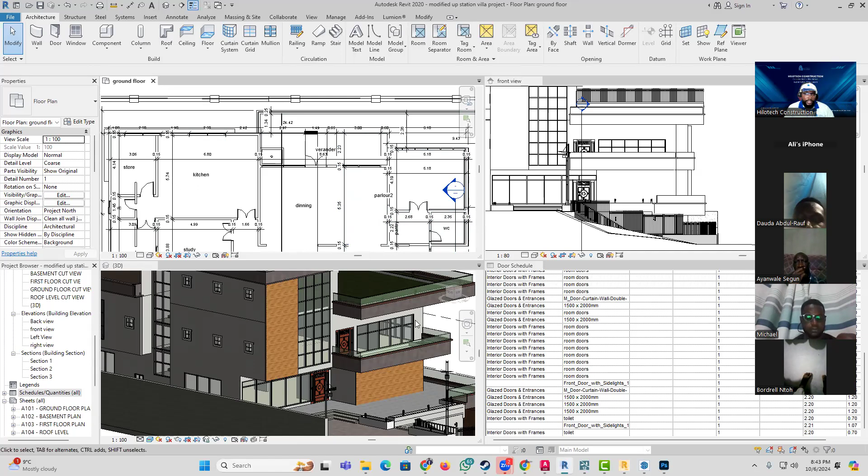So all those things you have to avoid. That is why, in addition to the BIM course, we have other courses: electrical design, plumbing design, mechanical design, and of course advanced structural analysis design. So the BIM course, in a nutshell, just gives you the methodology of everything. We cover like everything as far as all that is concerned. But then, if you want to really be a real professional in each of these different departments, you go in for those advanced courses so that you know exactly what you're doing. But the truth is, as a BIM expert, you're supposed to have all that knowledge if you really want to bring out a good plan, and abstain yourself from bringing out all these plans that always cause problems.

Because let me tell you something. What sells in this field is not you bringing out 100 plans and they are full of trash. Bring out one plan, just one, okay? And it is executed perfectly. That's it, that's just it. Now, when you take your time and you bring out a good plan, following all the steps that we actually teach, you bring out a perfect plan. That's just it. That's how you see the recommendations start coming in. Because the client is going to be like, no, go meet this person, this person is going to solve your problem, he knows what he's doing. That's seriously just it. You understand?

All right, so when we're done with Revit, the next software that we're going to be looking at is Lumion. Now, I'm sure some of you, this is the same project, by the way, the same project that we were just looking at, but this is now in Lumion.

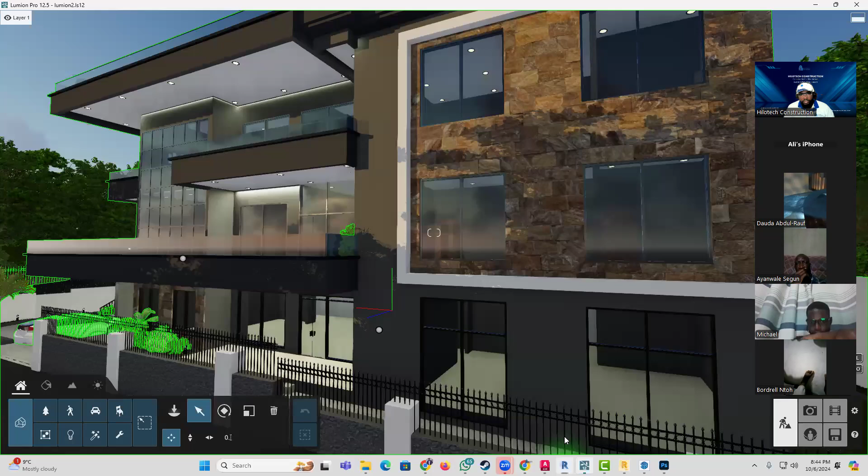So in Lumion, what we're going to look at now is how you take this same project, import it into Lumion, and make it look really realistic, as you can see. I think anybody looking at this can really understand the project.

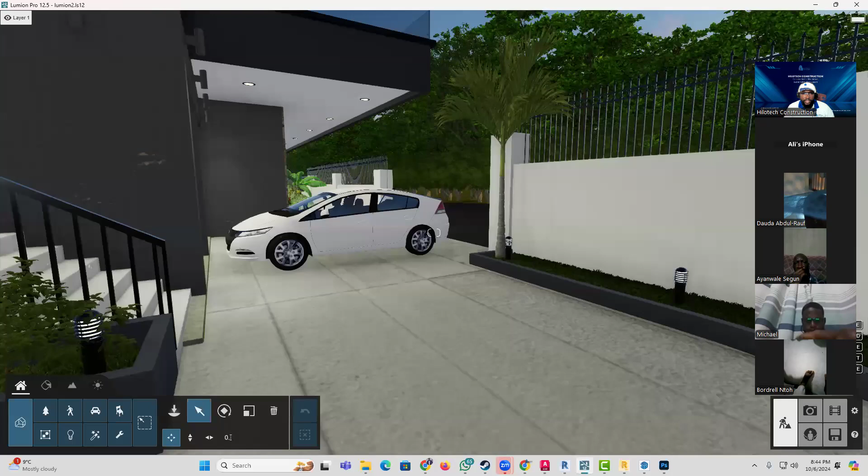You can do this and create a very good walkthrough. You can see the garage here. We've not yet done the interior design for this project, it's just the exterior. As you can see, this is the basement. So you can do this and have a good view to walk around.

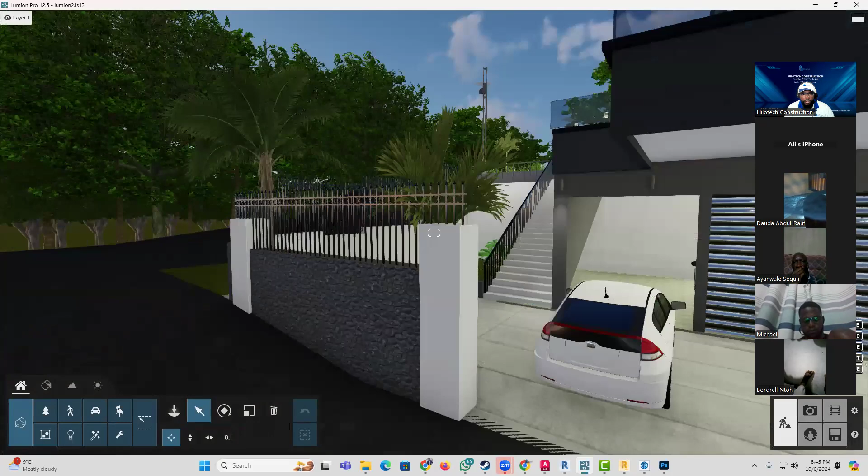This project has this basement. You turn this way, go up a little bit, and then you have the ground floor. You can see the stair going down there, and stuff.

So coming into Lumion is for you to bring this in and make it look as realistic as possible, like you simulate it to look like the finished product.

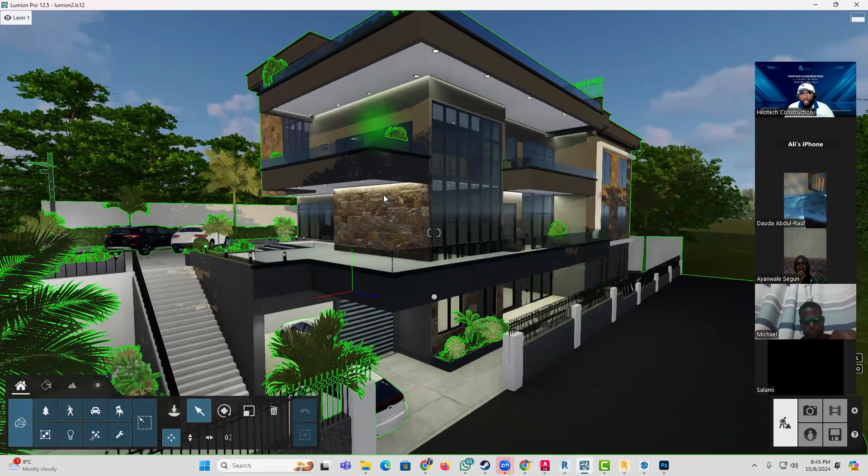So when you're done from here, you can now bring out your pictures and videos, like render very high resolution looking pictures and videos after applying your materials, putting in all the landscaping. You can see the trees, you can see the weather, you play around with the sun, all those kinds of stuff, bring in some components, and stuff.

We teach you how to do all that. And then you bring out your pictures and videos looking very real and very realistic, like this.

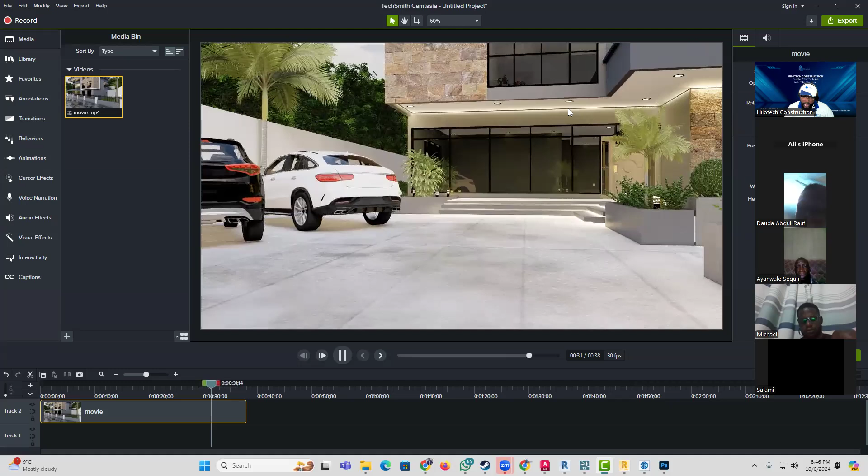So before arriving at this level, from what I've been explaining, we've incorporated all those different techniques, and this is the final product, making sure that everybody is on board, from the designers, which is us, to the engineers, to the client, to everybody.

They are on board and they are okay, and everything here is good, and everything as far as the ventilation, everything has been respected and everything is good.

So you come into Camtasia now, it's a post-production software, and you come in here mostly to bring out a video and to present your project.

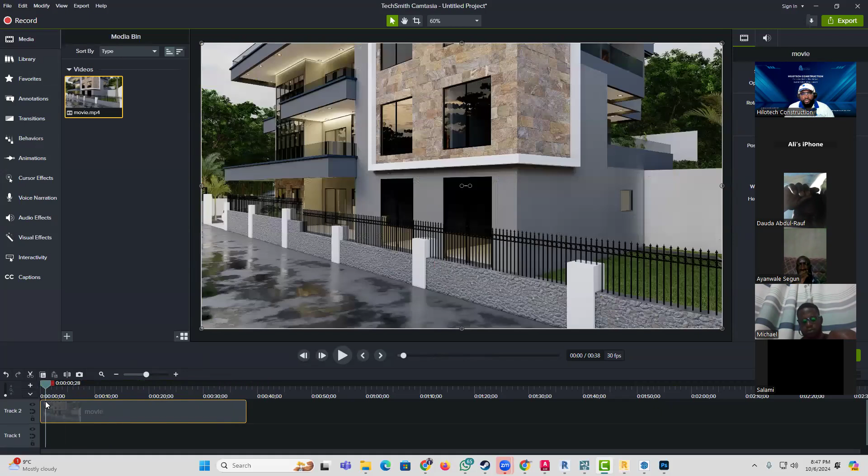Because when you render this out of Lumion, imagine you just send a blank video like this. What is it talking about? The whole idea is for you to really bring out the design intent, to really communicate what the design is talking about, and you cannot really do that if you're just sending it blank.

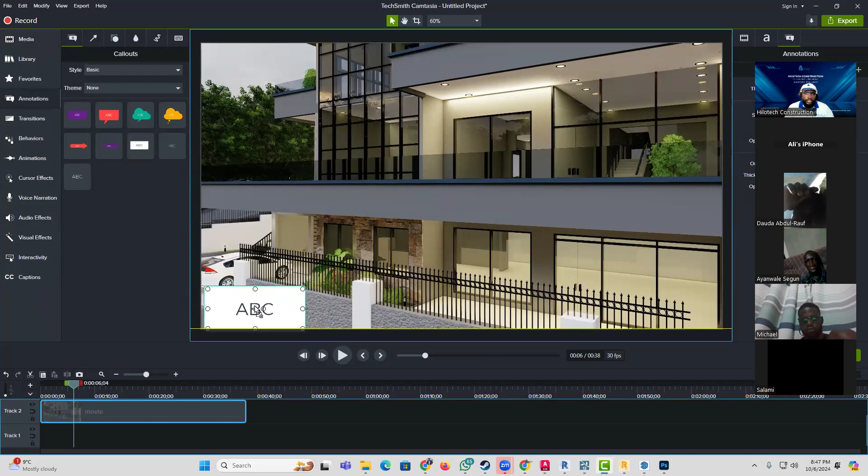So Camtasia is going to help you put in all those key details. Like you can see, I can just start putting in here, I can start bringing in some text, and stuff.

And I'm typing, like, okay, this is a modern villa, and this is this. At this level, we have this. At this level, we have this. At this level, we have this. Give a very good description.

Add some effects to it to really make it look stylish, and stuff like that. Maybe add a little bit of sound or music to it.

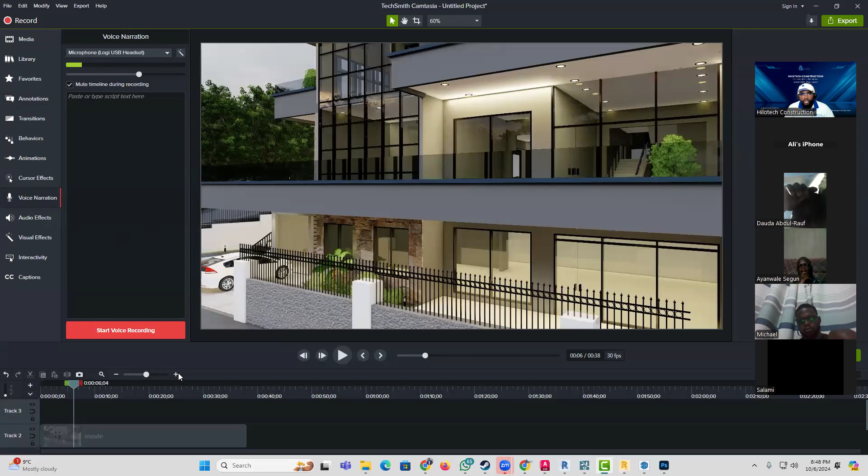You can even do a voice recording, like you can see as I'm speaking, you see the volume going there. So I can put a voice recording here to really explain what the project is talking about, why it's playing, I'm just recording, and stuff like that.

Or I can type in a text and let it appear like a subtitle or something. After I have done that, I render out a video and can put a logo to it. Yes, and this concludes the BIM course.

So this is what the BIM package is all about, four softwares: AutoCAD, where we look at construction drawings; Revit, where we look at the BIM itself; Lumion, where we look at all the rendering and all that is concerned; and of course, Camtasia, where we do post-production as far as the videos and all that are concerned.

Okay, that ends the BIM course.

The BIM course is the foundation to all the other advanced courses, which means before we enroll you or accept you for any other course, you must have concluded a BIM course. Another thing is the advanced courses are strictly for engineers. So we can permit anybody to go in for the BIM course, but for the advanced courses, you must provide us proof that you are a certified civil engineer or about to be certified before we enroll you.

And of course, all these courses are certified courses, which means at the end of the training, you have to undergo an exam, which if you succeed in, you are actually going to be awarded certifications to certify you that you're a certified professional in this. And we will not certify you if you don't actually really deserve it.

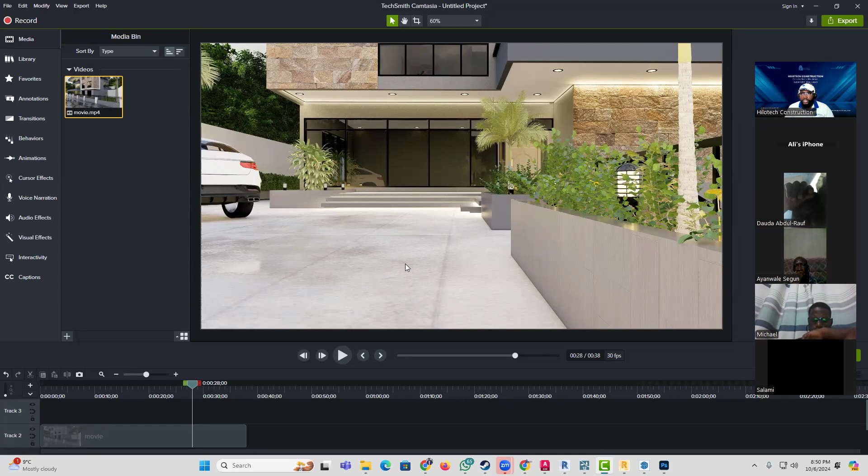Okay, that sums it up for the BIM course. We have other courses, which are the advanced courses. And I will start with the advanced structural analysis. Now, advanced structural analysis, strictly for engineers, we'll be using 2 softwares.

We'll use the BIM software, which we just used here, which is still Revit. But now we'll be working mostly with the structural analysis part. You will now see how you can bring out a project, or this same project that you see here, and you analyze it to bring out your result. What do I mean by analyzing?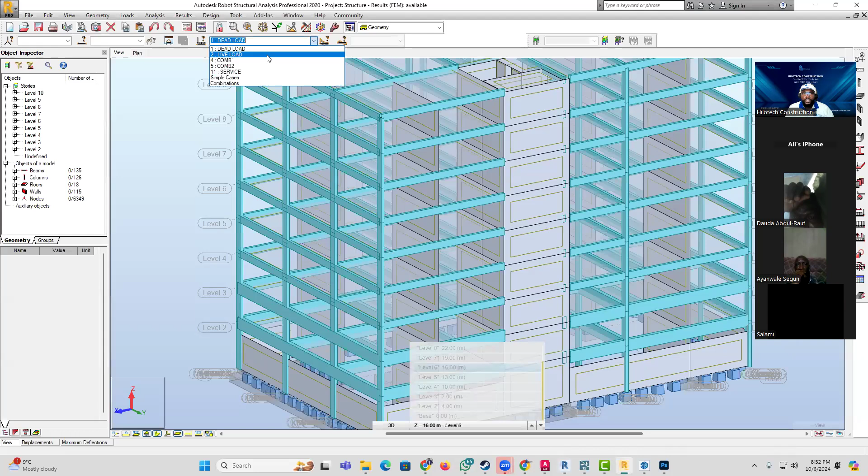And with just a click of a button, the whole project is transferred into Robot, as you see here. And the only thing that you need to do now in Robot is just fill in your load cases, your dead load, your live load. Just bring up some of the symbols, and as you can see, it's filling your load cases after calculating your dead load, your live load, and all that.

And that is why I say this course is strictly for engineers. Because we are not going to be teaching you how, well, we'll still teach you, but you're already supposed to know how you can calculate all this dead load, live load, wind load, service loads, all those different types of load from your training as an engineer. Even though we are still going to teach you that, we will not be that elaborate. So that is why we say this is an advanced course.

So after you do that, boom, you run your analysis and you evaluate your results. As easy as that. Just imagine, and this is going to be 100% accurate because you are sending the exact model that you have designed here into Robot.

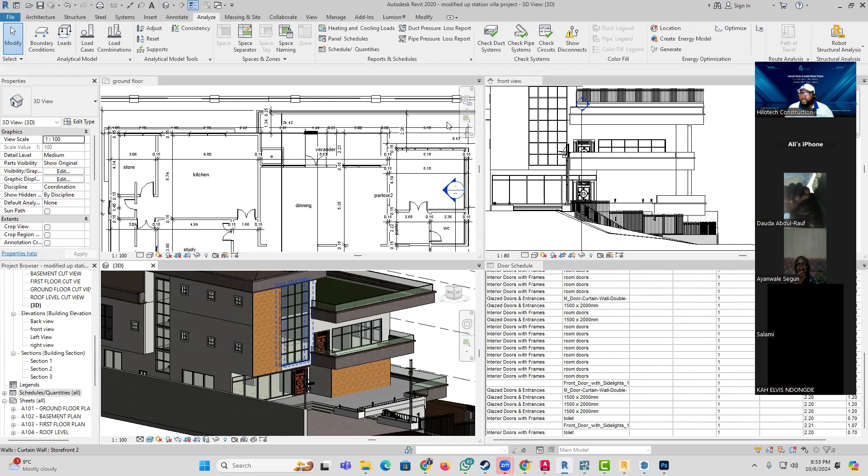You don't come here and start designing from scratch. Maybe you had a curved beam or something circular that you cannot really bring out in Robot, and you just assume you put something straight, which is what a lot of you do. It's wrong. But with Revit, you can design anything you want, and with just a click of a button, send it to Robot, apply your loads, set your load cases, run your analysis, evaluate your results, print them out, and you're good to go. We teach you how to do all that.

We also have the advanced mechanical, electrical, and plumbing design course, still using Revit. If you look there in Revit, you have the same Systems tab, and this is where we actually do that. Still on the same project where we did the architectural and structural design, we do the mechanical, electrical and plumbing design in 3 dimensions, very realistic. All those components are populated in your estimates, so there is seriously no room for error.

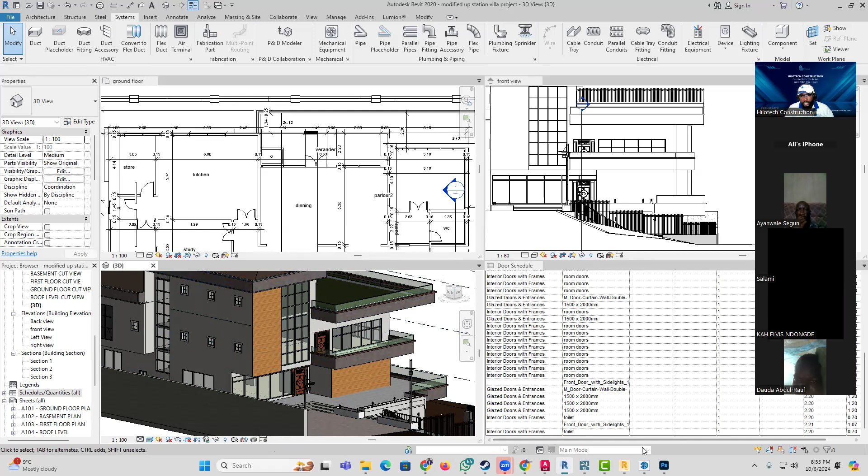And the last but not least, the advanced interior design course. We have other courses coming up, but those are the five we have for now. Anybody that has completed the Revit training, you don't have to be an engineer to take the interior design course. You can actually take that. The softwares we use for interior design are Revit, so you see why you must go through the BIM training, and then of course SketchUp.

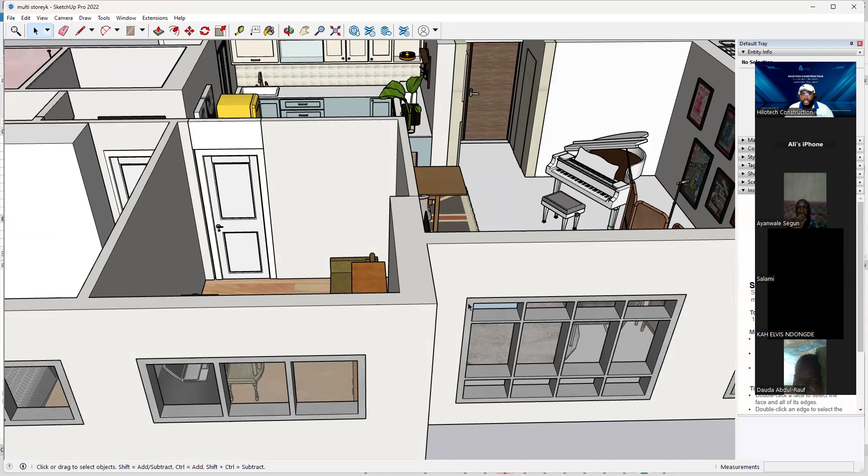Here you'll see how to bring out very good interiors of everything from your living room to your bedrooms to your toilets. This same project that we're seeing will show you how you can export it, bring it in here, and bring out your interior design, ending up with very good, realistic looking interiors for your project. We also do some post-production using softwares like Photoshop, and for the rendering proper, we'll still be using Lumion.

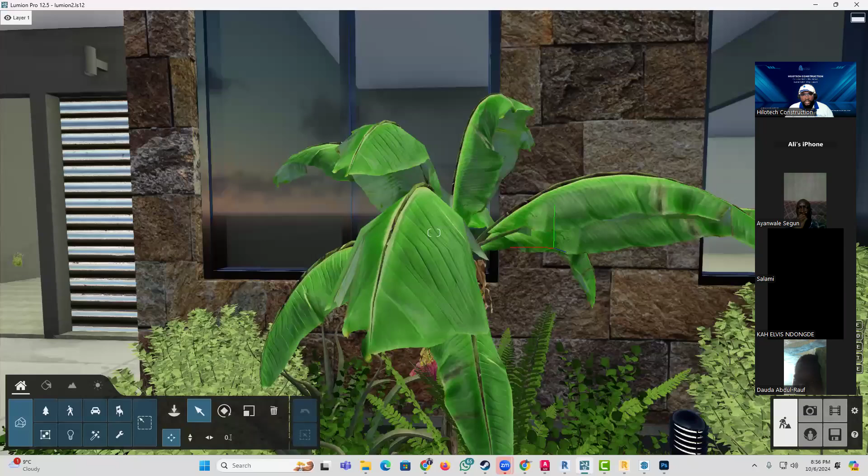But like I said, for this project, the only thing done so far is the exterior design; we have not done the interior. So as far as the interior is concerned, we have to work on it using the same softwares and methods I'm showing you. By the time we are done, this project will have a well designed interior. For now they are just empty spaces — the only thing you can see, even upstairs, is maybe just the staircase, but all the other spaces are just empty.

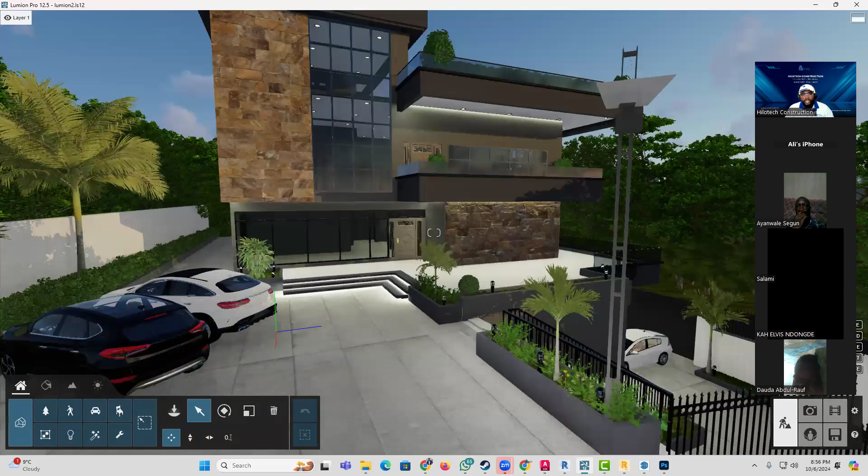When you're doing your project just for a beauty perspective, just for exterior, you don't really have to do a lot as far as the interior is concerned. You can just throw in a little bit of chairs or some light furniture just to simulate the idea that it looks like a living environment. But as far as detailed interior design is concerned, you have to do it the right way, which is what we show in the interior design course. So those are the five courses that we actually have.

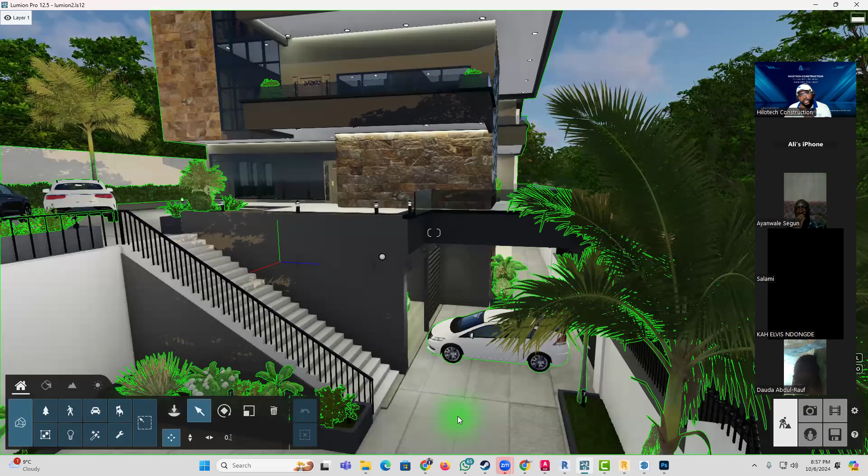Now the way that we go through these courses, there are two ways: you can either choose to do the courses online or offline. It's just unfortunate that offline, if you are not in Cameroon, we always need a certain number of students before I can displace myself to come to your respective country, wherever that is, to teach you guys.

It is always a crash course, which means if we're organizing something like a physical training—that's what I call offline training—we have to organize that separately, and I have to displace myself. But we must have a certain number of students before I come and teach you guys. It's going to be a crash session, meaning a session we can take just about a week to go through.

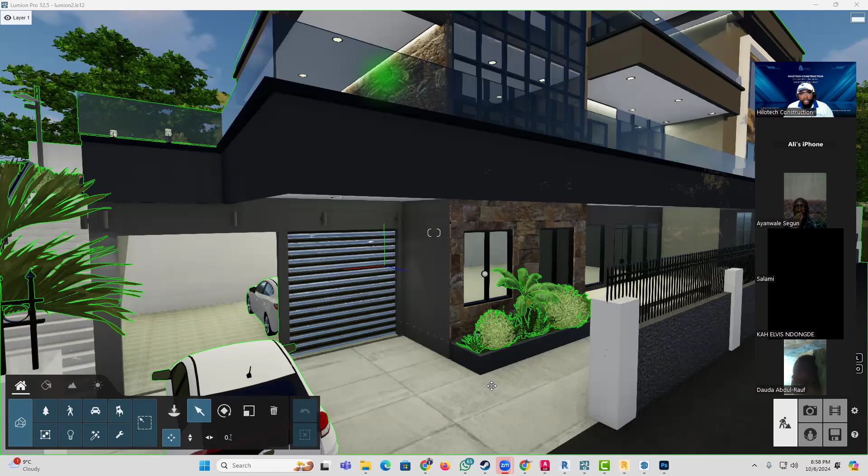Now, back to the online training. The courses are already well recorded online. So for those who are not going to be able to take the physical training and just want to take it online, let me just share this real quick.

If you're interested in taking the training online, what you have to do is indicate interest and you'll be added to the training forum. Then you'll be sent a link. You'll have to go through the payment modalities, which you'll find on the site. The payment varies with respect to your location, but we're doing a promotion so it's not expensive. Once you do the payment, you'll be sent that link and can have access to all this.

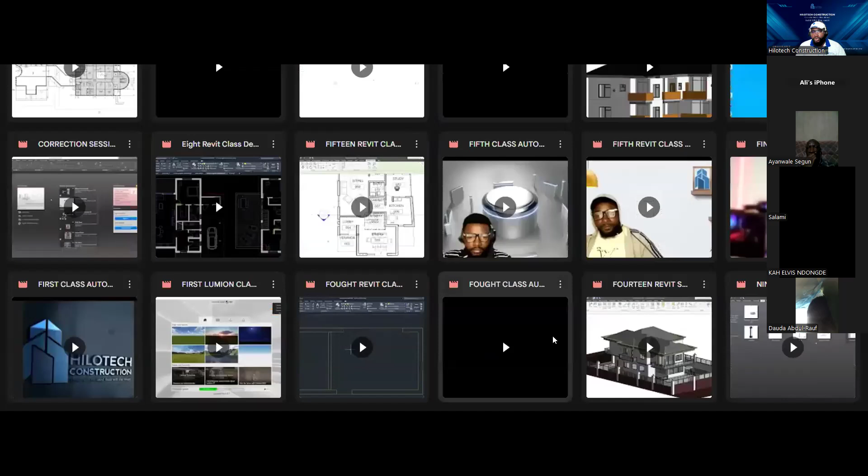You just log in and have access to the full package, which includes all the different courses, and you can watch online. You have lifetime access, so there's really no problem—you can watch online or download and keep it, whatever you want to do.

At the end of the day, after going through all this, you'll be put in a WhatsApp forum, and after you've done this, you have to write the exam. It's after writing the exam that we're actually sure you understood. In that forum I'm always there, so if you encounter any difficulty, just drop your question and I'll answer. We also hold occasional Zoom meetings in the forum to attend to all questions. That is how we handle the course online.

So if you're interested in taking the course online, these are all the well-recorded videos, more than 30 hours of lectures—seriously, a lot. You just come here, download or watch online, and at the end of the day you're good to go. But for offline, for those in Cameroon, you just come to Yaoundé at the training center and you can be trained physically if you find yourself in Cameroon.

For those who are not in Cameroon and want physical training, I repeat, the only way we can do that is you indicate interest and we do the orientation. If we can get a certain number of people, engineers and professionals—this training is not only for engineers or architects, but for everybody in the field.

It can be CEOs in companies, or somebody who wants to train his whole team, because these are skills that everybody in the construction profession is supposed to have. To be honest, it doesn't mean that because you're an architect you don't need to know something about structural analysis. It doesn't mean that if you're a structural engineer you don't need to know architecture.

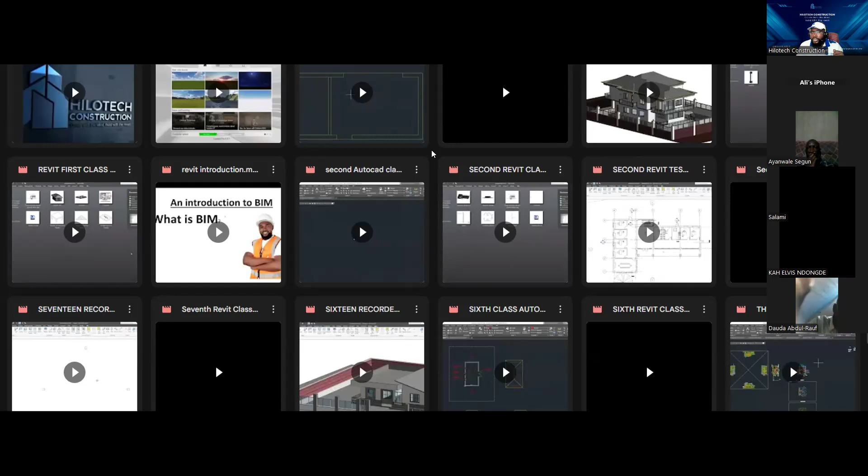Or something to do with plumbing or electrical design - you need to have an idea of all this. That is what BIM is all about, to avoid all these errors, so that when you bring out your designs, you're doing it the right way, building a project void of errors. That is what we are really striving to solve with the BIM course.